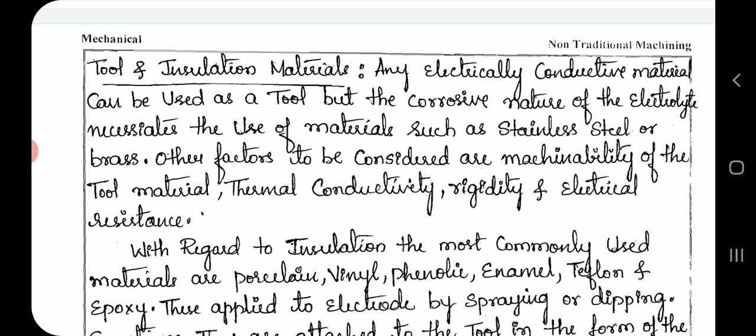With regard to insulation, the most commonly used materials are porcelain, vinyl, phenolic, enamel, Teflon, and epoxy. These are applied to the electrode by spraying or dipping. Sometimes they are attached to the tool in the form of pre-machined self-supporting members.

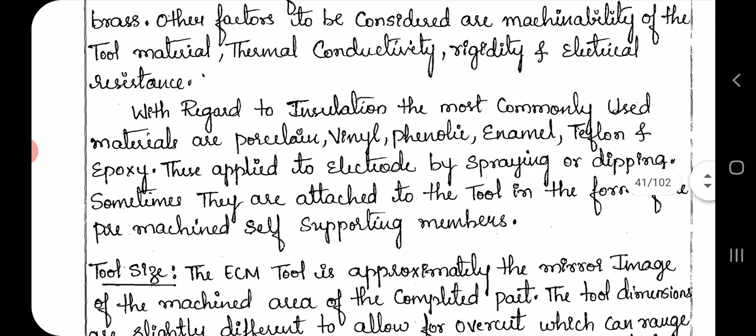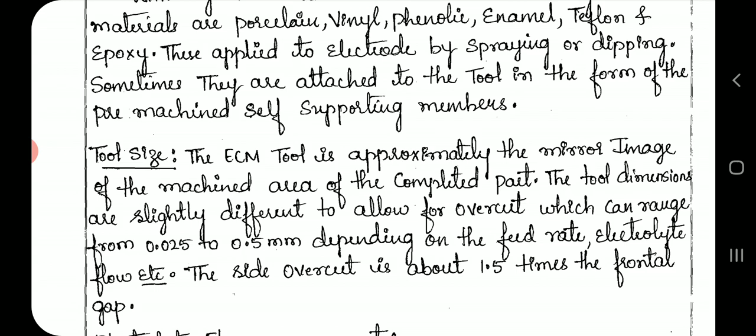Tool size. The ECM tool is approximately the mirror image of the machined area of the completed part. The tool dimensions are slightly different to allow for overcut, which can range from 0.025 to 0.5 mm depending on the feed rate, electrolyte flow rate, etc. The side overcut is about 1.5 times the frontal gap.

Electrolyte flow arrangement. Correct flow across the tool is essential for proper machining. Attention should be paid to the tool shape where cavitation of the electrolyte is likely to occur. Tool design must permit a uniform electrolyte flow in all machining areas. Excessive flows are also not desirable as they erode the tool.

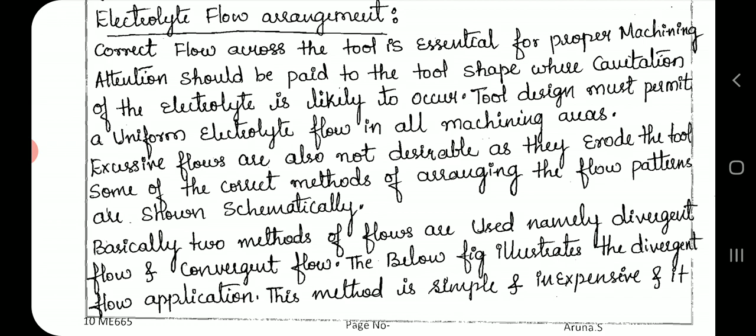Some of the correct methods of arranging the flow patterns are shown schematically. Basically, two methods of flow are used, namely divergent flow and convergent flow. The below figure illustrates the divergent flow application. This method is simple and inexpensive, and it works satisfactorily in most cases.

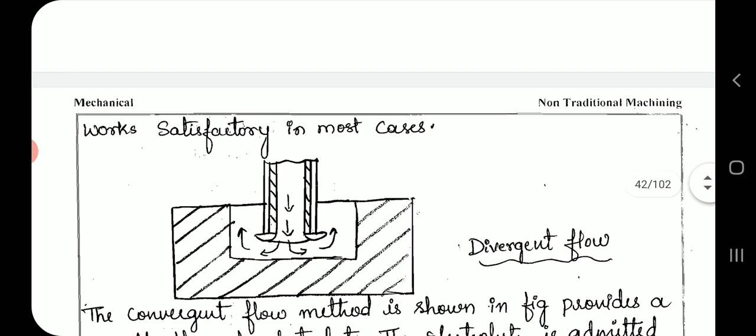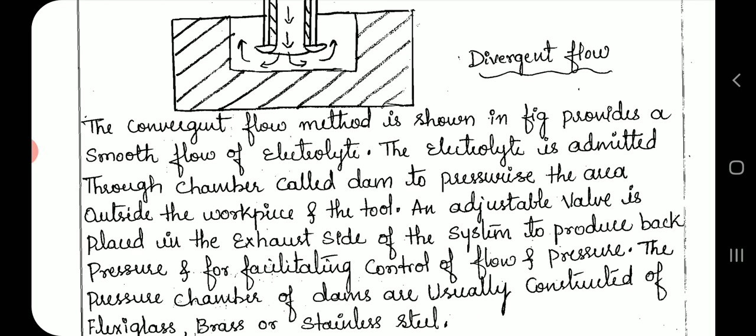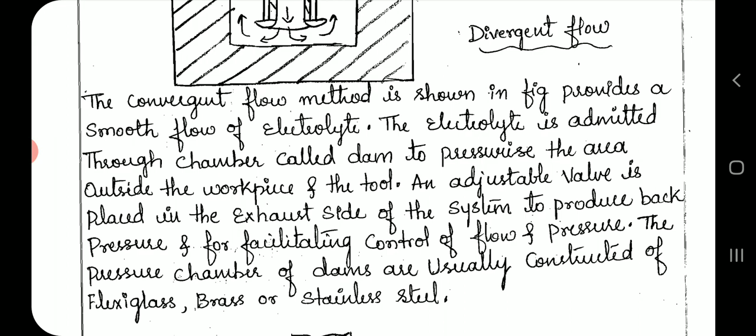The convergent flow method shown in the figure provides a smooth flow of electrolyte. The electrolyte is admitted through a chamber called a dam to pressurize the area outside the workpiece and the tool. An adjustable valve is placed on the exhaust side of the system to produce back pressure and to facilitate control of flow and pressure. The pressure chambers or dams are usually constructed of plexiglass, brass, or stainless steel.

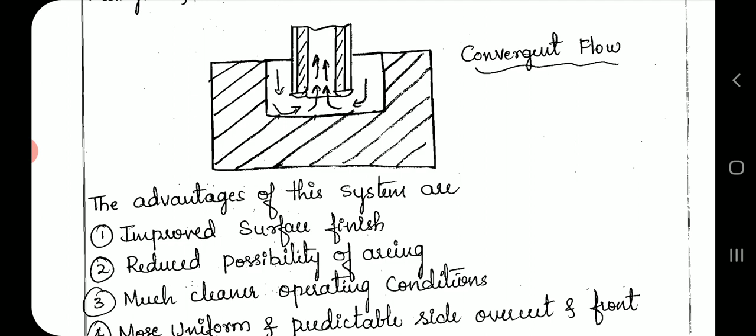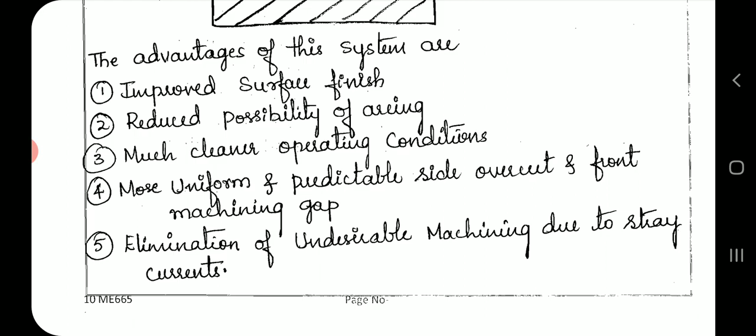The advantages of this process system are improved surface finish, reduced possibility of arcing, much cleaner operating conditions, more uniform and predictable side overcut and front machining gap, and elimination of undesirable machining due to stray currents.

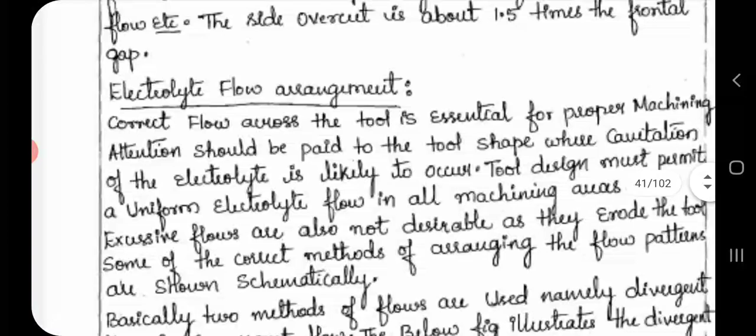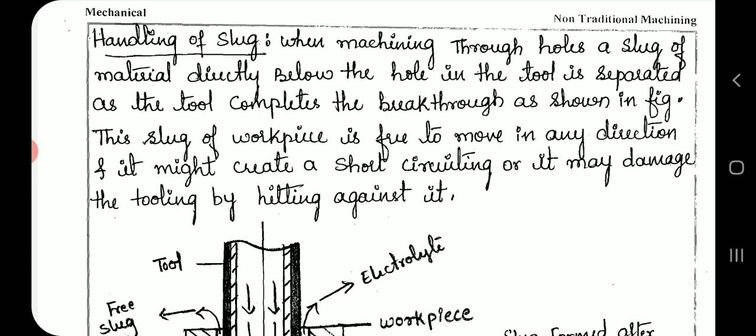Handling of slug. When machining through holes, a slug of material directly below the hole in the tool is separated as the tool completes the breakthrough, as shown in the figure. This slug of workpiece is free to move in any direction and it might create a short circuit, or it may damage the tooling by hitting against it.

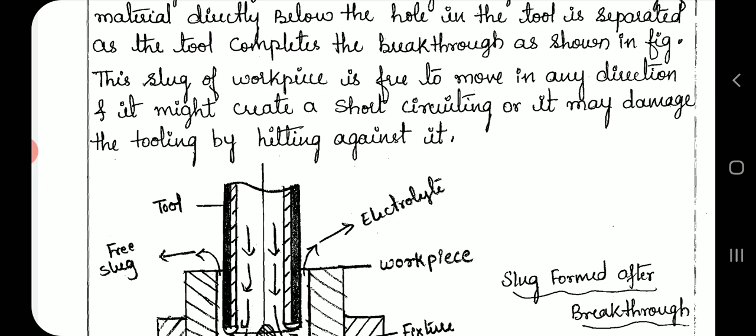Slug formed after breakthrough. Safe handling of the slug.